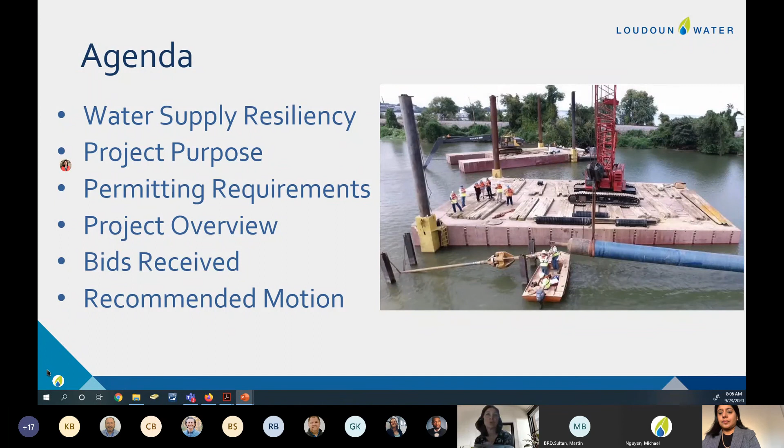First off, it's important to understand that this project is really a water supply resiliency project. That is because our primary source is the Potomac River, and we get all of our supply through ourselves and Fairfax Water from the Potomac River. The Goose Creek assets provide a backup to that supply. So we're going to talk a little bit about resiliency and, as I mentioned, the purpose of the project, and I want to make special note of some of the permitting requirements associated with this project.

Since our supply is primarily the Potomac River, we have constructed all of our assets from the Potomac raw water pumping station back to Trap Rock. That's the yellow line you see on this graphic, showing the raw water transmission main that takes water from the Potomac to the Trap Rock treatment plant.

There are probably two primary issues or threats associated with the Potomac River: extreme low flows or drought, or spills and very bad water quality in the river. These occurrences could threaten the Potomac supply and potentially impact Fairfax Water as well as ourselves. That is why the Goose Creek assets, the Goose Creek Reservoir and Beaver Dam Creek Reservoir, provide such a wonderful redundancy for our system.

As you know, when we bought those facilities back in 2014, we have been keeping the Goose Creek water treatment plant wet. After we continued using it, and after Trap Rock came online, we've been maintaining them in a standby condition, but it's a very old plant.

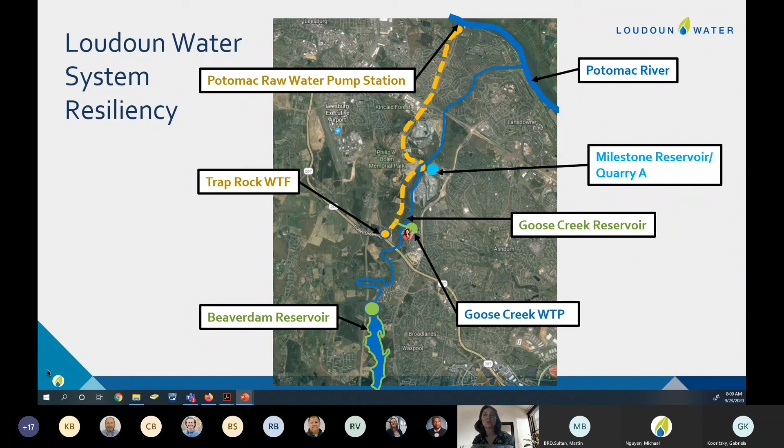We recognized that we could probably better bolster our system if we could get a direct connection from that supply that we could treat at the Trap Rock water treatment plant. So this is what this project really is all about. It's using the proximity of the two systems, connecting the existing intake at the Goose Creek raw water pumping station to our Trap Rock raw water transmission main. We can get water from the Goose Creek system to the Trap Rock water treatment plant in an emergency. So that's the essence of this project.

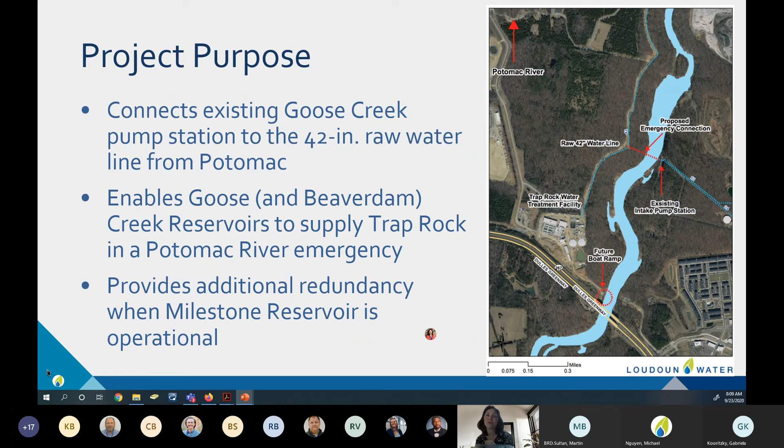It's making that very small connection from the pumping station to our new raw water line, and it enables us to utilize the Goose Creek supplies to supply Trap Rock in an emergency. Once the Milestone Reservoir is online and can serve in this function, we're sure we'll be able to look at additional ways to tap into the value of the Goose Creek and Beaver Dam reservoirs as redundancy to the Milestone Reservoir.

Something unique about this project, and it's a fairly complicated thing, is the permit we needed to obtain from DEQ to construct these facilities - that's all of the facilities you saw on that graph: the raw water intake, the transmission mains, Trap Rock, as well as Milestone Reservoir. This is a 15-year permit, first issued in November of 2012. We had to make several modifications to it as the design drawings were actually completed.

There was a minor modification early on, and then when some of the other design drawings were completed, we needed to make another modification. Then, after we brought Trap Rock online, we needed to modify it yet again for this project to enable this emergency water supply connection. Once we have design drawings in hand, it's likely we're going to need to modify it yet again to incorporate any design changes from those initial concepts included in the initial permit application.

Then in 2027, since the permit has a 15-year duration, we'll be looking to renew it. With all of these facilities in mind, it'll probably be much more focused on operation rather than construction. But it's complicated - it's a 26-page permit, and 20 pages of those are special conditions for the various projects. As Kathleen walks through our choices in this project, the decisions we made, and the bids we received, it's possible that the complexity of this permit may have impacted some of the bids.

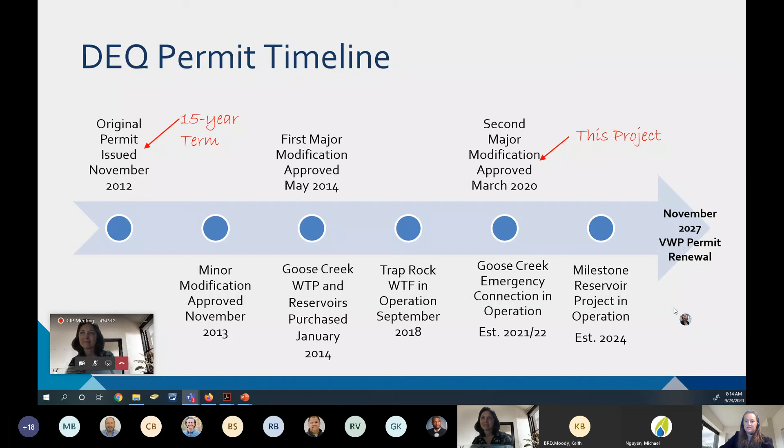Pam talked about why Loudoun Water needs this project for raw water redundancy and resiliency. But there were multiple different ways we could have provided the resiliency to get the water from Goose Creek Reservoir and Beaver Dam Reservoir to Trap Rock.

The first option is obviously just to keep the Goose Creek Water Treatment Facility in standby mode. That's what it's doing now, and we did invest a lot of money in those assets. We paid about $30 million in 2014 to purchase Goose Creek, the reservoir, the water treatment facility, the Beaver Dam Reservoir, and the WNOD transmission main. We put about $17 million into the rehabilitation of Beaver Dam Dam. And when we first purchased Goose Creek and were running it on 12-hour shifts, we put about $1 million into it just to get SCADA and make it easier to operate. So that was something we looked into.

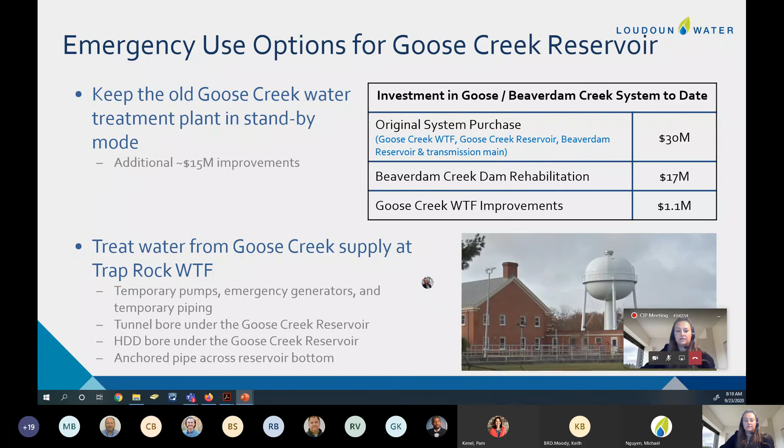So the project itself, the Goose Creek Water Treatment Facility is over here, right off of Belmont Ridge Road. And the Goose Creek Intake Pump Station is right down here on the reservoir bank. The existing raw water transmission main runs right here to Trap Rock. And this project, like Pam said, we're just connecting the existing pump station to the existing transmission main.

So it's about 800 feet of pipe. We are also including some air release valves, a couple of check valves, replacing in the existing intake pump station. We're adding a couple more butterfly valves, and we're going to install a flow meter vault so we know how much water we're pulling out of the Goose Creek Reservoir and sending to Trap Rock.

We also included a boat ramp with this project, as we don't currently have a way to get onto the reservoir, and we assumed that the contractor would need one in order to install the pipe. And we also threw in the relining of a stormwater pond at Trap Rock.

Mr. Sultan, did you have a question?

Yeah, just an old water guy asking a question. What are you aiming at on the raw water main? Is there an existing fitting, or are you tapping into it?

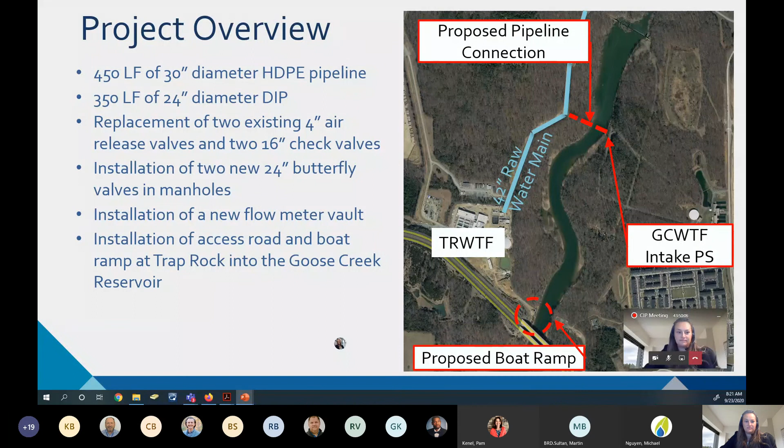All right. So because of the coronavirus, I couldn't have a normal pre-bid meeting. Normally, when we put a project out to bid, we meet with the interested contractors on the site. We walk the site, we answer any questions that they have. But because of the limit of only 10 people together in a group because of the pandemic, we couldn't do that this year.

So I hired Apertures, and they did a drone video of the site, and I actually did a virtual pre-bid meeting. I basically took a video of myself talking alongside the drone footage and posted that online for contractors to view, and then gave them the option of making an appointment to meet me out there to see the site if they still wanted more information. So I'm going to play a portion of that video for you and kind of walk you through the site so you can get an idea of what it looks like too.

So here's the greenway. Trap Rock's at the top of the hill. This is where the boat ramp is going to go into the reservoir, basically right where the finished water main and the force main from Trap Rock, the tunnel, was. So this is all cleared because that's where they ran those two mains. But as you can see, this is a pretty steep hill, so we're having the contractor install a gravel access road down to the boat ramp down this hill.

And this excavator that's out there, Hensel Phelps, is on site right now trying to bore under the greenway to get their sewer main across. But as you can see, this is the access from Trap Rock that we're going to have to use.

So the other part of the project is the pipeline crossing. And here's the existing intake pump station. We're putting the pipe right across over to the raw water transmission main. Now we're flying from the west bank to the east bank, so we're going over towards the pump station. And you can see how wide the creek is here, it's about 500 feet.

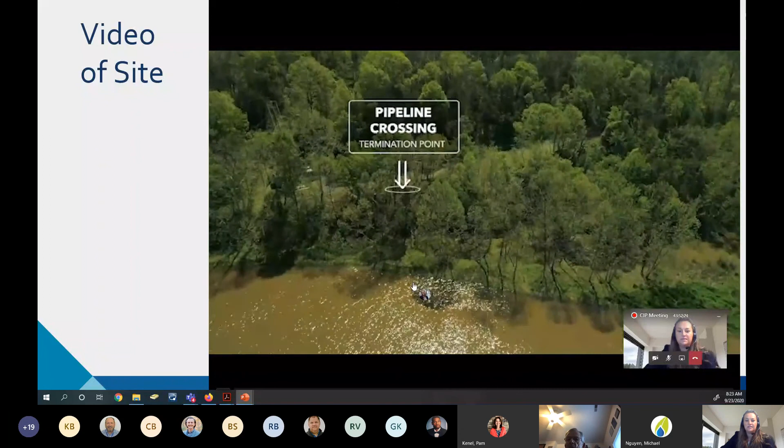And you can see all these wetlands. This is the portion of the wetland that we're going to impact that we had to buy those mitigation credits for. Again, we're flying from west to east, and I just wanted you to see how steep this bank is on this side. It's basically a cliff face.

So the contractors wanted to come out and see how steep it really was to see how they would access this point. You can see this orange barrel right here, that's approximately where the pipe is going to turn and go across the creek. But you can see the access on this side to the pump station is good. That's how we currently access the pump station and do maintenance.

So now we're going to fly back from the east bank to the west bank. And the west bank is a lot less steep, but it is heavily wooded. So we will be taking out, I think, a 40-foot wide swath of trees in order to put in our pipeline.

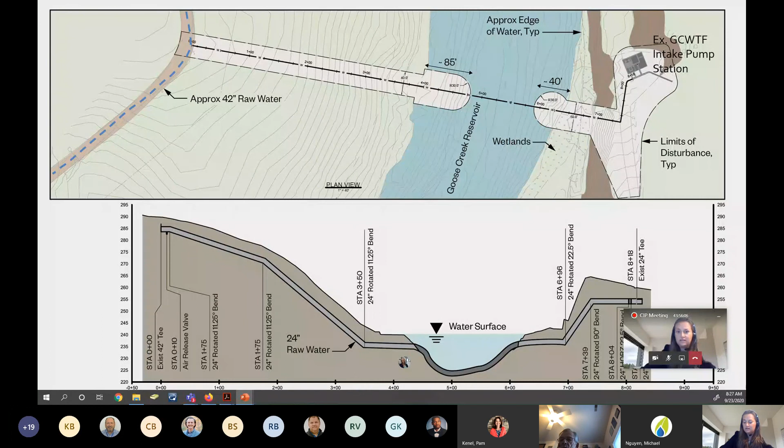With that, there are 2 ways of getting the pipe onto the bottom of the reservoir, and we didn't dictate which method the contractor had to choose. They could either pull the pipe along the bottom - basically fuse all of their plastic pipe together, put their concrete ballast anchors around the pipe, attach the pipe to a sled, and then just winch the sled across the bottom of the reservoir. That was one option. Or they could float and sink - assemble the whole pipeline, put their ballast on, have a barge pull the whole assembly out into the water, and then start filling that pipe with water to sink it down to the bottom.

All of the contractors that bid on this job actually picked the float and sink method, but it's up to the contractor to choose which method they preferred. Either way, the pipe is acceptable. Something to note here is Loudoun Water has never done a marine pipeline construction before, so this was unique for us, and I think it was a little bit unique for the industry. There are some complexities with it.

So the final part of this project is the boat ramp. I sort of explained why we're doing a boat ramp, but I wanted to go into a little more detail. Our existing access to the reservoir is way down here - this is the face of the Goose Creek Dam. Our existing boat ramp is right here, about 25 feet from the dam face. So it's really not a safe place to put a boat in, and right now it's not very deep here, so it's not really a very good access.

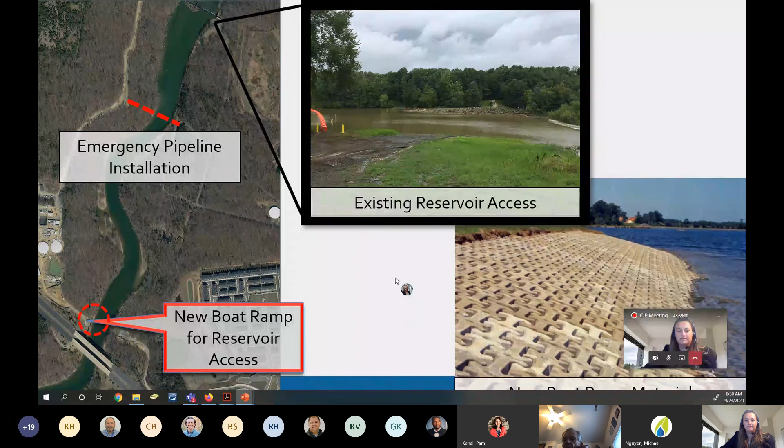So there is risk with this project. Obviously in design, we tried to mitigate as many risks as we could, but some of the risks we can't. Environmental risks, we are working in a river. There is a current. The water is flowing, which means that it could flood. There could be high flow times. There could be debris washing down. And that's just inherent in any construction we're going to do in this reservoir. So with marine construction, that's always going to be a risk.

Specific to this project, there's a lot of specialty equipment that the contractor is going to use. And when you have specialty equipment, there's a risk. There's a risk of a schedule delay. And some of this equipment is expensive. So there's a risk in that the contractor's not ready for the equipment when it's on the schedule. And then there's just your standard construction risk and schedule delays.

Like I said, the pumps at the existing Goose Creek water treatment facility intake pump station are fairly old. There's a risk that they might not start. I mean, we are not currently using them because the treatment facility is in standby mode. So, but once we start construction, the pumps just might not start back up once we're finished and we need to test the project.

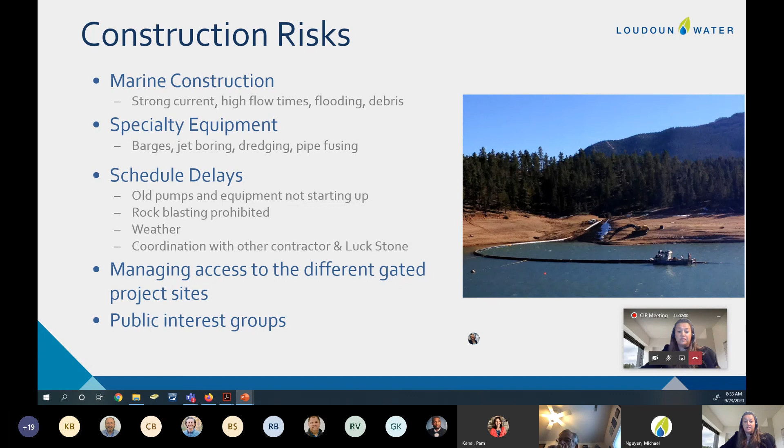So with that said, we put the project out to bid in June. We opened bids August 11th, and we received 3 bids. There's a pretty wide range there. The contract, though, specified some pretty hefty experience requirements. We wanted to make sure that whatever contractor we chose would be qualified for all of those risks I just talked about. We didn't want to put somebody on a moving water body that had no experience doing that previously.

So we asked for experience working in water with cofferdams. We asked for experience working with large diameter HDPE, and we asked for experience doing this lay-the-pipe-on-the-bottom construction that we've never done before. Unfortunately, Shirley withdrew their bid on September 1st. They didn't feel that they could meet those requirements. And so we started negotiating with the next low bidder, Garney.

As you can see, Garney's price is quite different than our engineer's estimate. And I have some reasons for that on the next slide. But we did negotiate them down a little bit. We got them to remove about $75,000 just after talking with them about what the project actually was.

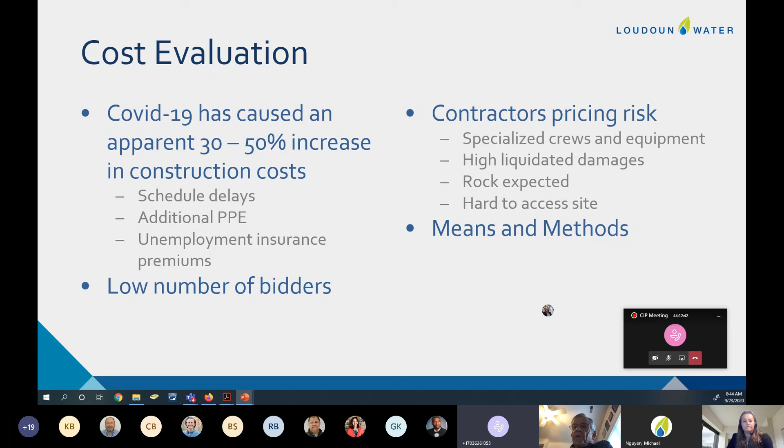I guess we can move on to the motion. All right. So we're asking for Garney for 4.335 million with a 5% contingency. What does the rest of the committee think? I would recommend that this go to action item. Anybody have any other thoughts? Yeah, it should go to action. It shouldn't go on consent. Yeah, I agree. This is Keith. I agree.

Okay, good. Can I get a motion? I'll make the motion as displayed on the screen. I'll second it. Gabby, can we get a roll call? Roll call vote. Mr. Sultan? Yes. Mr. Bonfils? Yes. Mr. Moody? Yes. Ms. Sursikar? Yes. Thank you. Unanimous.

Okay, can we move on to the next item, which is the, I don't see it here, the construction phase services for this job. Good morning. I'm here to request authorization to issue a task order for construction phase services for the Goose Creek Emergency Water Supply Connection Project. Before I begin the presentation, I want you to know that we are developing a presentation that describes how we actually develop our construction phase engineering task orders. And we are planning to present that here in the next couple of months, sometime this fall.

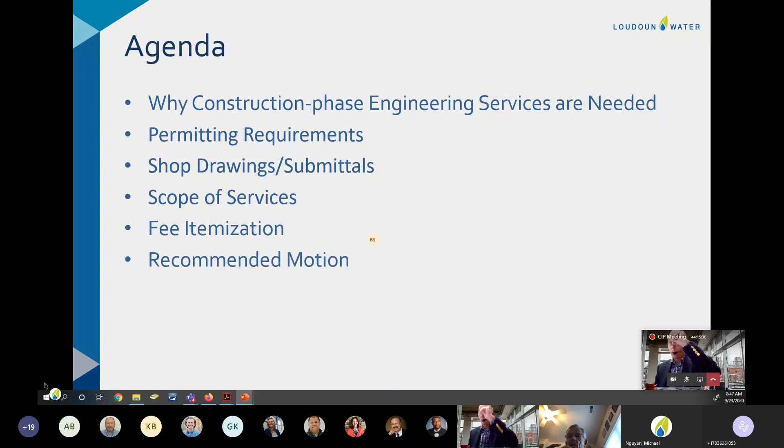Engineering services are needed really to leverage the engineer's understanding and expertise. Hazen had designed the project. They have the experience in putting in pipelines of this nature, going across water bodies. So by using Hazen and engaging them on this project, we are going to maintain our indemnification protection, and we're also going to maintain continuity, which will provide efficiency and cost effectiveness as well, the most economical approach.

This is a really unique project for us. In fact, it's the first time that we've ever done subaqueous construction here at Loudoun Water, and it's also the first time that we've had to dredge a body of water to perform that construction. So this is a really unique project for us in that way. Plus, we have extensive permitting on the project as well.

The engineering services are necessary to help us through all of that. By using the engineer, we will leverage their understanding. We'll have their review and administration, and, as I mentioned earlier, we'll maintain their indemnification protection on the project.

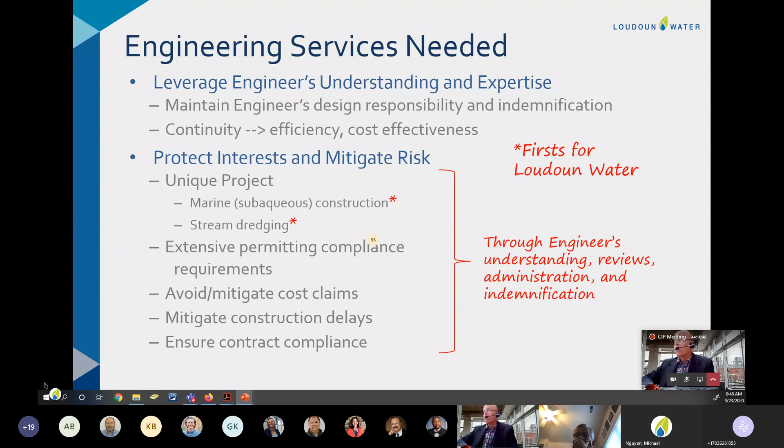Just a little bit on permits. I've got the 5 permits listed here. We go from the federal level with the Army Corps nationwide permit down to 3 separate state permits for the project. And then, of course, we have the local Loudoun County grading permit as well. This is as many permits as we've certainly ever had on a project. And I can certainly never remember having a Virginia Water Protection Permit on any of the projects that I've worked on here at Loudoun Water.

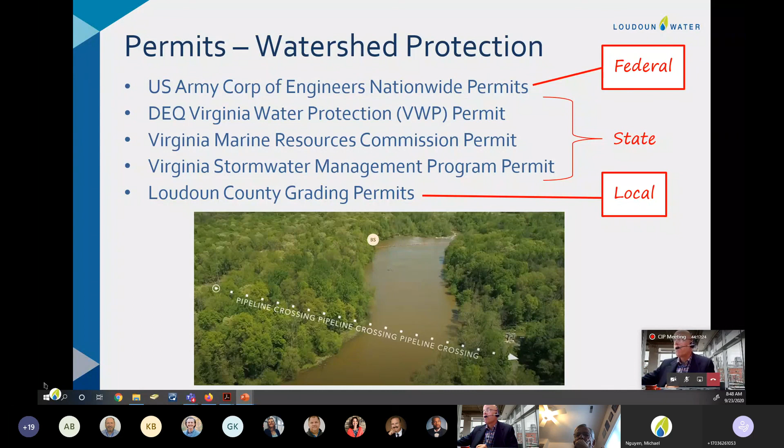On the Virginia Water Protection Permit, Hazen will be using Wetland Studies and Solutions as a subconsultant on the project. They will be performing weekly inspections, and they're going to prepare monthly impact reports for us. Hazen will also be reviewing the submittals from the contractor and sharing those with WSSI Wetland Studies and Solutions to ensure compliance. And then we'll also have monthly inspections as well. This is all about ensuring compliance with the permits.

When Pam mentioned the length of the permit in the project, those permit requirements become supplemental conditions in our project here. So that's the sort of thing that also impacts bid results, as well as extensive permitting requirements. So while our name is on the permit, we pass that compliance along to the contractor, but we need to ensure that they are complying with it. So we incur those additional costs there, and that really protects us and keeps us in good compliance at the state, local and federal levels.

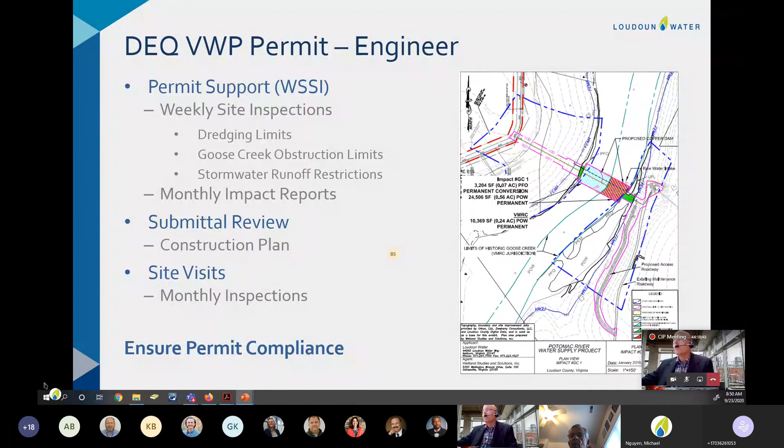I want to talk a little bit about submittals because we have some really unique shop drawings on the project, and I've listed 3 here: a dewatering plan, a dredging plan, and the shoreline excavation. Every one of these submittals requires that they be stamped and sealed by a professional engineer in the Commonwealth of Virginia. So these are really unusual submittals for a project that we do. It's not unusual for us to get PE stamped submittals, but we don't normally get those to reflect the construction methods that the contractor is planning to use.

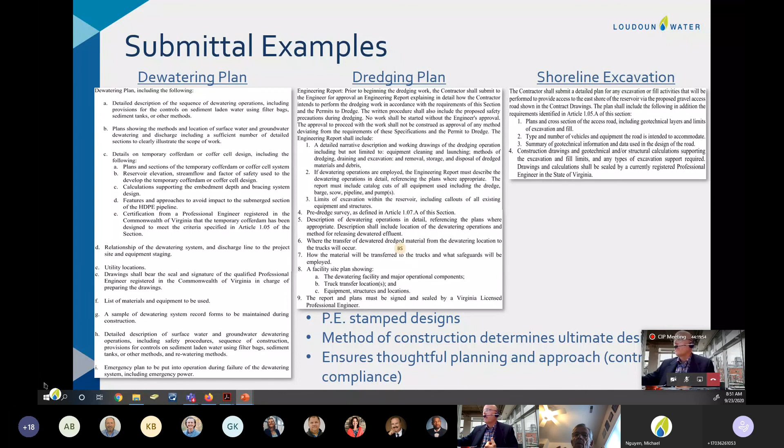And so the method of construction determines the ultimate design. As Kathleen mentioned earlier, there's the bottom pull method, and then there's the method that uses the barge, where they float the pipe across and sink it with concrete ballast. That determines the ultimate design, and we get a stamped and sealed shop drawing with that. We want to ensure that they're thoughtful about how they are approaching the work, and that they've planned it in accordance with the contract and the permit requirements that are in our supplementary conditions. Any questions on these?

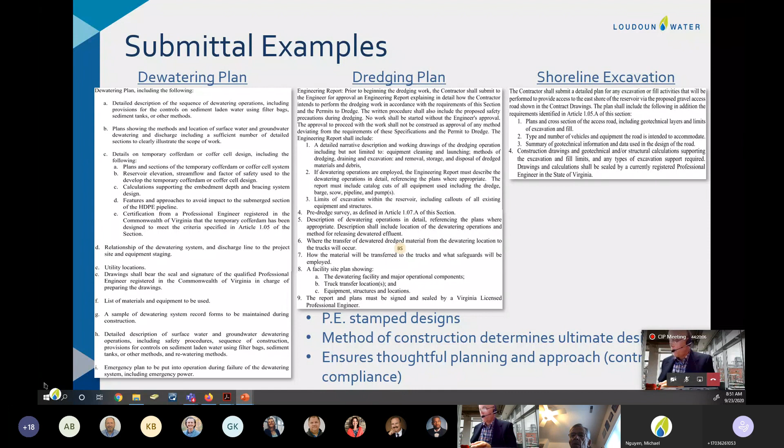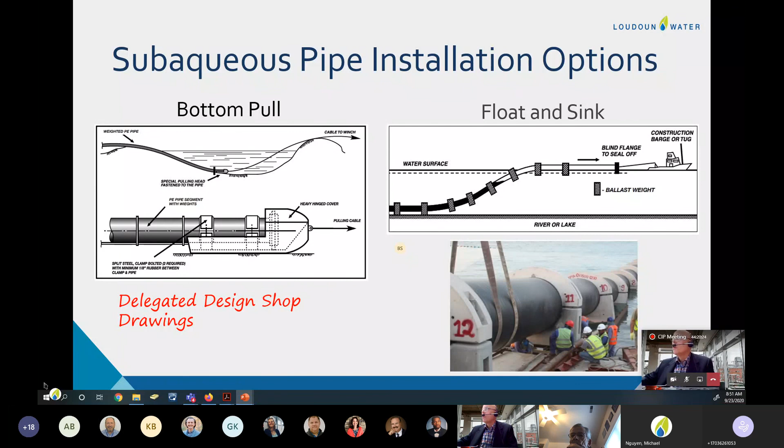Okay, this is a slide that I borrowed from Kathleen's presentation. This is all part of the delegated design, the shop drawing that we'll get. She mentioned earlier that the contractor is using the float and sink method, with a ballast weight that they put around the pipe. I've got the next slide that shows what that will look like. They'll be submitting that as a shop drawing as well, stamped and sealed by a professional engineer.

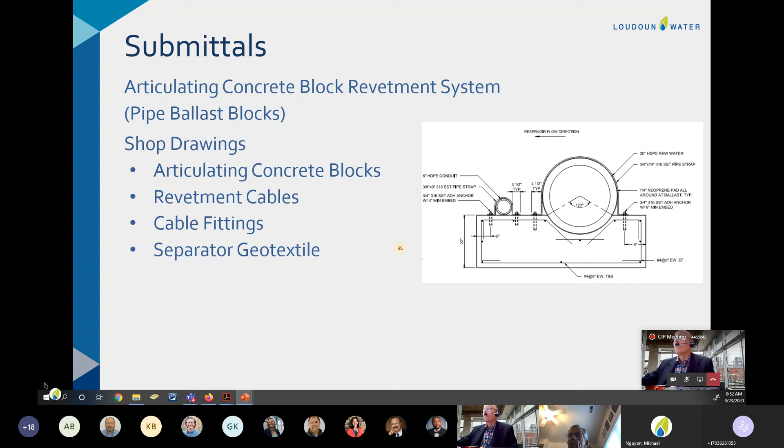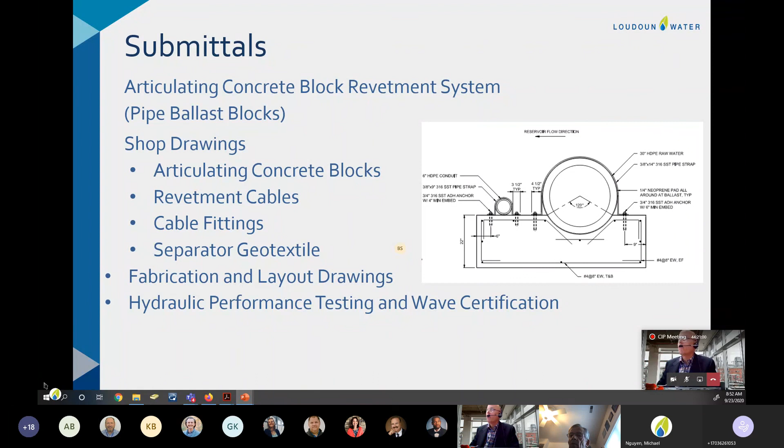We're going to get fabrication and layout drawings with that, and they'll also submit hydraulic performance testing and wave certification. The engineering requirements we're placing on the contractor for this project are pretty extensive. We don't see these types of submittals on our normal project.

Well, I'm going a little too fast here. Do I have any questions on submittals?

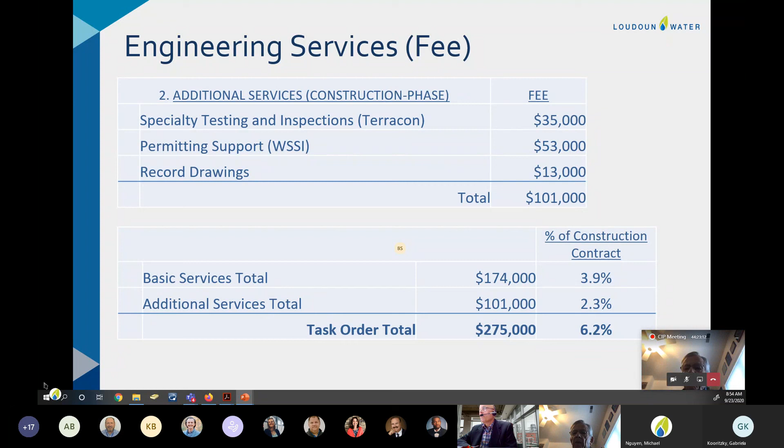Okay, so these are the total costs for this. Shop drawings are just under 2% of the construction contract total, and I bring that up only as a follow-on to our discussion a couple weeks ago about the Cortland pump station project. The clarifications are at just 0.2% of the overall construction contract value, in as much as you may want to look at this in the context of the construction cost itself.

The total task order amount is $275,000, which is 6.2% of the construction contract cost.

Hey Brian, yes, this is Mark on the phone. Hey Marty, as you know I'm very passionate about the CA services by professional engineers, and I spent a lot of time talking with Roddy on this, and I fully support this price. It's right in line with what needs to be done. Just wanted to tell you that. Thanks. That's good, that's good to hear.

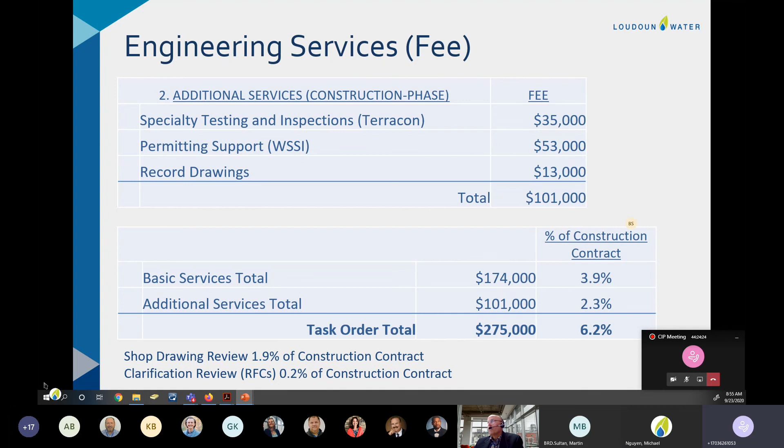Second. Gabby, can we have a roll call? Roll call vote: Mr. Sultan, yes. Mr. Bonfils, yes. Mr. Muti, yes. Ms. Sursikar, yes. Thank you. Unanimous. Thank you very much.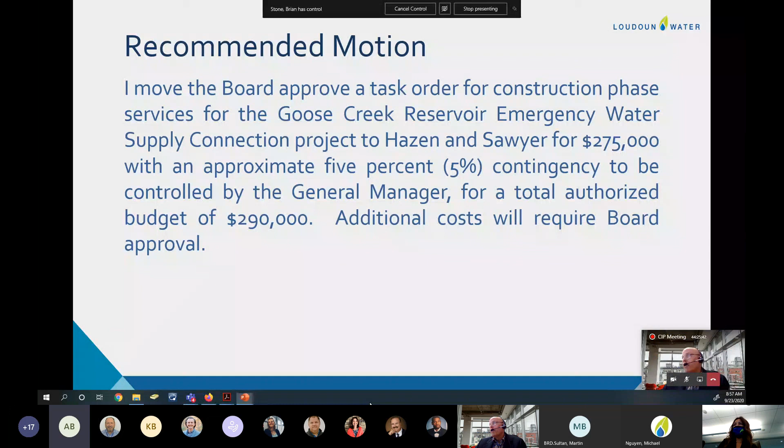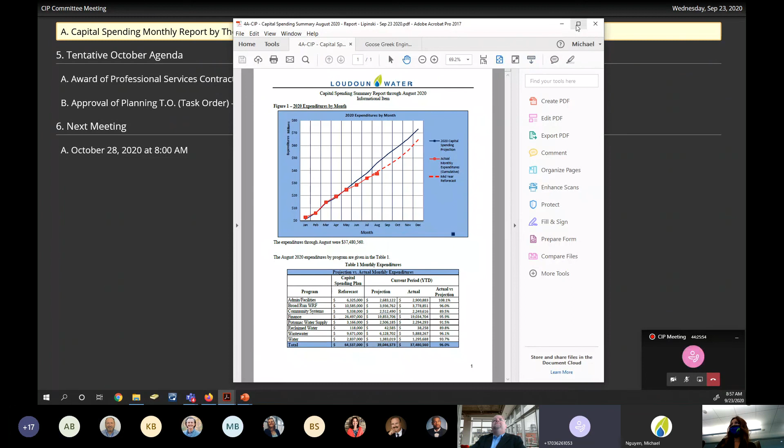Next, the capital spending report. Good morning, if there's any questions I'd be happy to answer them. The capital spending report is shown in front of you. I don't have anything, I just noticed that the actual monthly expenditures are starting to bend downward, but only slightly.

Anybody else have any thoughts, questions? Nope, sounds like you're okay. Okay, thank you.

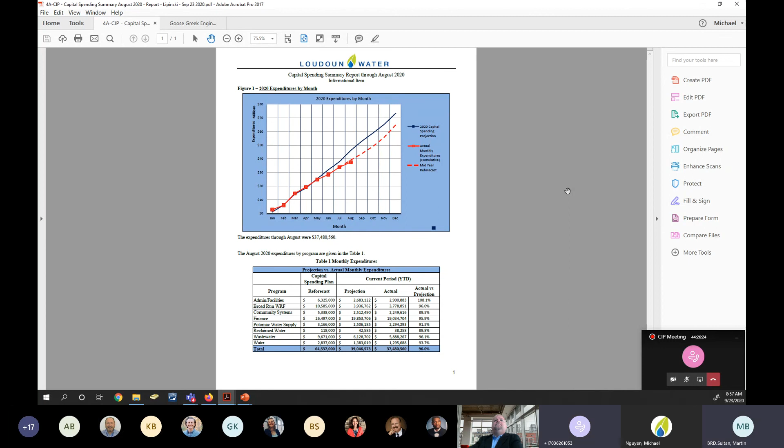Wait for the agenda.

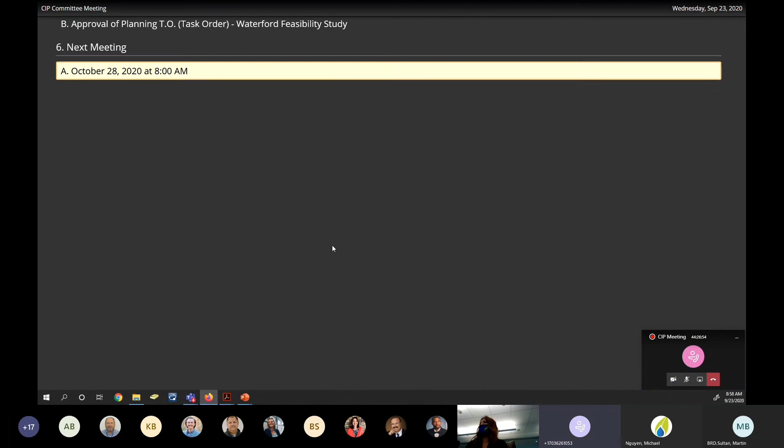I don't see the agenda in front of me, but I think that was the last item. Is that true? That is the last item. If that was the last item, can I get a motion to adjourn?

I'll make the motion to adjourn. It's Keith. This is Marty, I second. Roll call vote: Mr. Sultan, yes. Mr. Bonfils, yes. Mr. Muti, yes. Ms. Sursikar, yes. Thank you, motion passed.